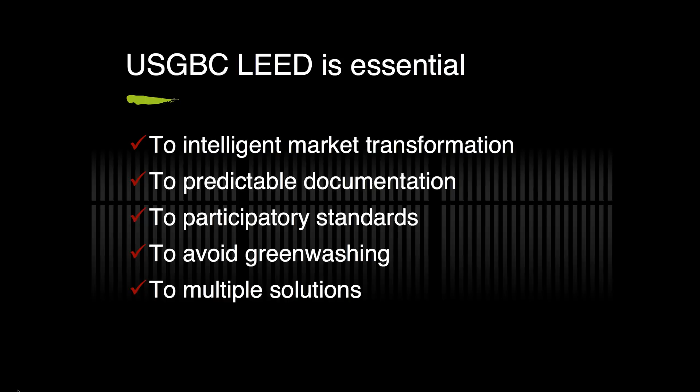So rather than starting with problems, I just want to go over quickly some what I feel are real solutions. That energy model is amazing in informing the building systems, the energy efficient mechanical systems. And until you do that energy model, you don't really know where you are in your certification model.

We had a project this morning where, when the energy model was finished, they'd sort of promised 7 points. We got 2. The project is only supposed to reach certified level, and looking for 5 other credits is now very difficult. But until you do the energy model, one, of course, you don't know where you are with regard to LEED.

But it's also the bigger picture of where are you and the amount of energy that the building is going to consume. Energy efficient building envelopes are really in the fore these days, and in many states, owners both public and private are commissioning both systems and enclosures. It's really making sure that the building is going to perform over time. You've all heard that over 20 years the cost of the building is 5%. The other 95% is the salaries of the people who work there. You just don't have the chance to go back and fix that air barrier.

Water use reduction, can't stress that enough. Indoor air quality, isn't that what it's all about? And don't forget the insulation and your dew point checks. We've talked about these things before, but insulation is clearly the best bang for your buck.

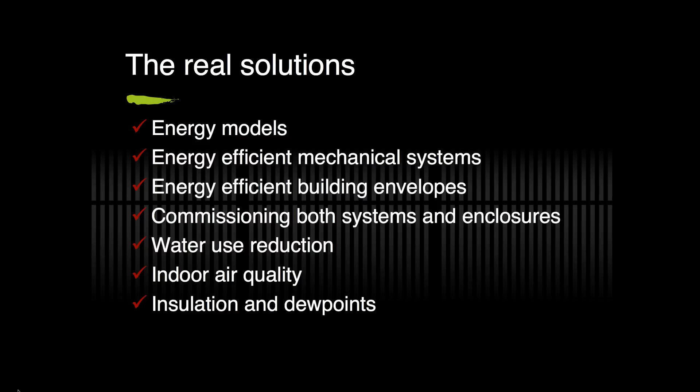Now, the problem that I have in our office with LEED specs is that most LEED projects come with a LEED consultant or someone in the design firm who's in charge.

I think there are far more firms that have people dedicated as LEED administrators than there are firms that have specification writers. So we're outnumbered.

Some people haven't had their basic CSI class in clear, concise, and correct, and so they feel they need to say something six or seven times. They need to repeat the VOC limits everywhere. It just gets completely out of control.

We've seen that before - the conflicting and unenforceable requirements. You know, when you say that you want your wood doors within 500 miles and you want them to be FSC certified, but you picked a veneer that just can't happen, it just becomes basically a fake spec.

A long time ago I learned that the last thing I wanted to do was confuse the contractor's estimator. We'll work on the job for a year, the contractor will get a month to bid it, the subcontractor will get a week, they'll spend two hours on it. And if the spec confuses the estimator, if money is thrown in for extra sustainability items that aren't necessary or aren't appropriate, it's a real problem.

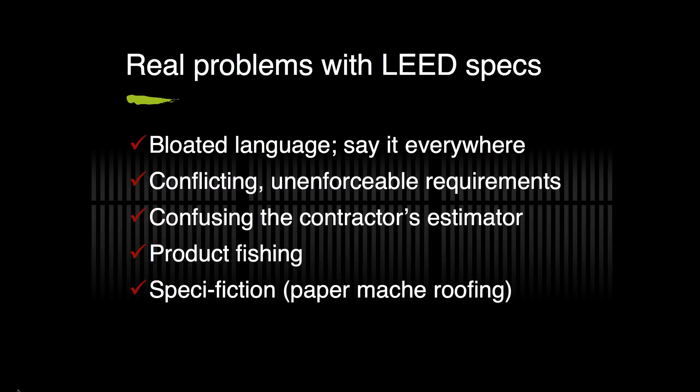Now there's also talk of a lot of red lists - red lists for a reason. Red lists generally meaning what chemicals am I not going to use. Perhaps you've seen the Environmental Building News pieces where they took everybody's red lists and mapped them, and there were a few things in the middle, but most of them had a tendency toward their own particular industry.

If you're General Motors and you're trying to paint your cars and you have silicone sealants in your paint shop, the paint won't stick. So that's a really good reason not to have silicone sealants in your paint shop. If you're running a hospital and you've got patients who are already immune suppressed, in many cases there are products that you just don't want.

We went recently through an exercise with a group of five hospitals where they decided that the rubber flooring was better than the polished VCT flooring when they looked at the cost of cleaning, the effort involved, the safety to patients. People have preferences for a reason.

We worked on some Google projects - they're very concerned about what they're exposing their personnel to, and so they have strong preferences and are a market leader. Very important to all of us.

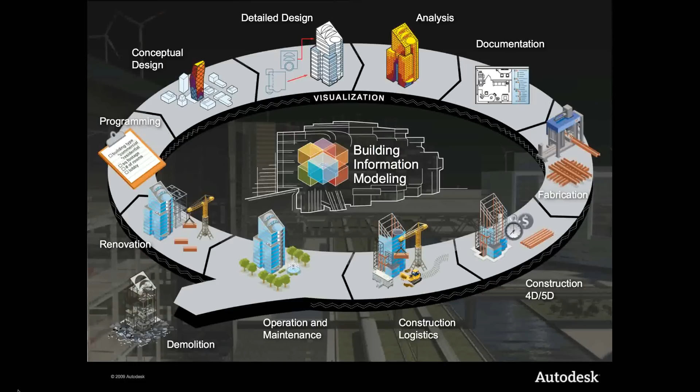This is a slide that I've shown before, and it's the life cycle of a project. Phil Bernstein from Autodesk developed this, and it just shows that we have to remember, we have to look downstream, that the spec is a tool that we're using for a very short period of time in the construction cycle, but those products that we're specifying and those certification programs that we're after are really pretty critical.

So when it comes to product selection having consequences, and again we'll get to some of the specific LEED credits, but to me performance is a sustainable attribute, and LEED doesn't always have a way to measure that, but you and I need to, our firms need to, the contractors need to, the building product manufacturers need to. It's that paper mache roof.

Just quickly, maybe you're seeing this - you've put up sheet flooring over concrete slabs recently and watch it blister, and then they tell you that if the relative humidity is under 75%, you can use whatever adhesive you want. If it's 75 to 90% relative humidity in the slab, you need one of the super glues.

And if it's over 90%, you probably need a moisture mitigation system, which could be $4, $5, $6 a foot. So we have to pay attention.

The greenest sheet flooring won't stay on a wet slab. Relative humidity and siding - if you're dealing with popular sidings like zinc or phenolics, many of them have to be used in a rain screen situation, because if the relative humidity on both sides isn't the same, you can get premature warping or corrosion.

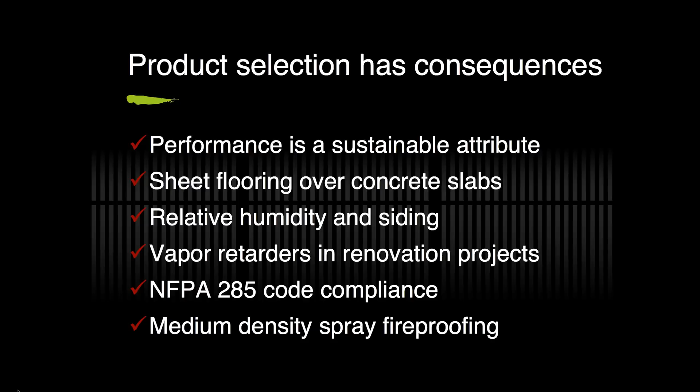Recent changes in codes to the spray fireproofing, where medium density fireproofing needs to be used on high rises, and the low density isn't suitable anymore.

So if we can take a step back and just say, what's a spec? So here's Mars ClimaPlus, and the architect has told me they'd like to specify this product from USG. They're the LEED credits, the features and benefits, and then I only get one page.

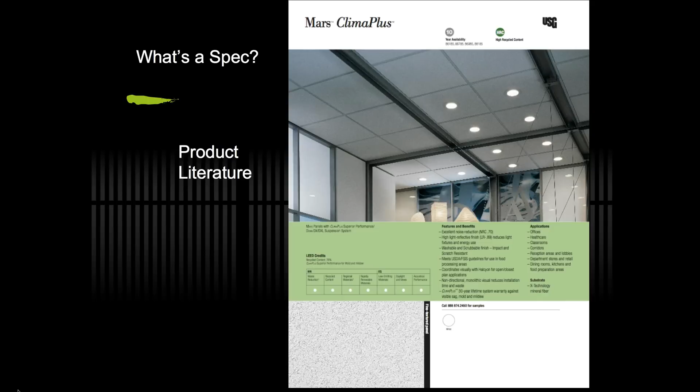Of course, we know that you have to turn to page 2 of the product literature, because there are 3 edges and 7 panel sizes and 7 grids, and usually I'm not engaged as the designer of the project, so it'd be better if the designer picked these, although in the absence of good information, I'll probably specify a middle-of-the-road product here, and then the conversation later can be whether or not we're going from 0 to the product that's ultimately selected. We're going from the middle range to there.

So these attributes, these performance attributes, many of them are affected by LEED. Some are, some aren't, but they're very critical to the manufacturers of the ceiling tiles, and so they register them.

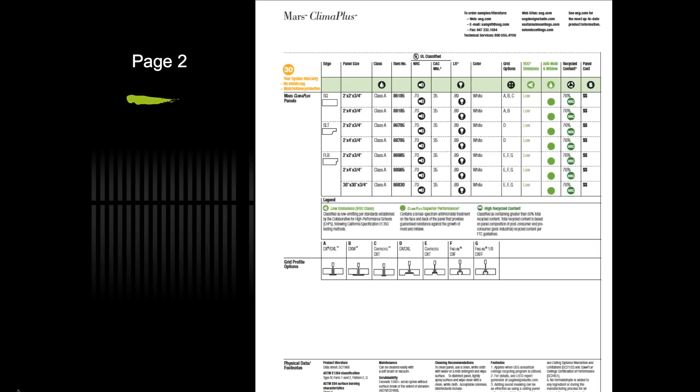If I want to put this in my favorite CSI 3-part spec, there it is: Mars ClimaPlus 86985 tile and fine line DXF, DXLF grid, and then some equals by Armstrong or CertainTeed, which is never a simple matter, and then the performance criteria.

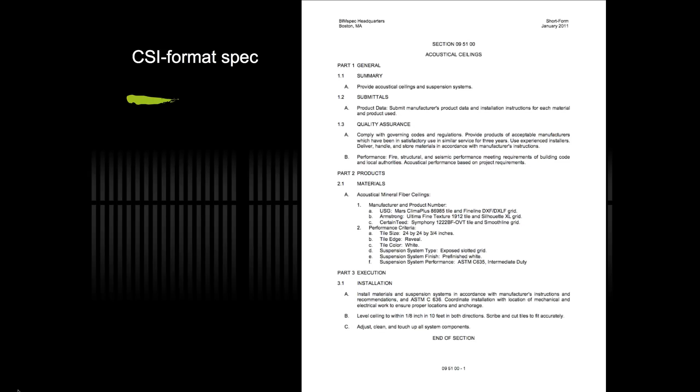So we capture this information from the building product manufacturers. We put it in our specs. We potentially put it in our BIM models. There's no limit to the number of columns you can have in a BIM model.

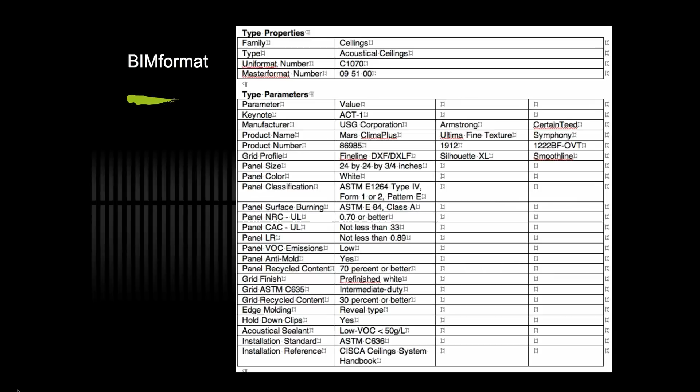Most people wouldn't take the time and aren't being paid to enter all those attributes, but they really do make a difference, whether it's energy analysis or R value or indoor air quality. When this information is in the model, we can be more predictable.

Things can predict. And then the sort of ultimate nightmare slide here that shows it's not just a ceiling. There are keynotes and there are master format numbers and uniformat numbers and cost codes and 7 LEED credits that this can contribute to. So if we're doing our job rigorously, this is where we're going to end up.

Hopefully the machines will speak to us in English instead of code. And again, maybe you see this on your projects, but this is out of a Revit model, and we get

a schedule of an item by code, manufacturer, product name, color, size, and then as a spec writer I can mark that up and without seeing the model, give it back to the architect to let them know where I need more information to actually make a spec work.

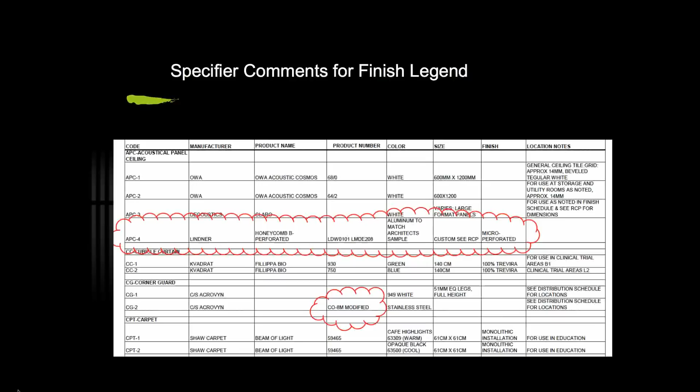So it's about looking downstream. Now

when we come back to the specific LEED credits, we know that there are 8 LEED programs. Only 8? I think that's the right number. And if you look at the different prerequisites in the credits, they're different from program to program.

So in our specs, the ones that are Microsoft Word based, we just use colored text and say this color is for LEED NC, this color is for LEED CI, and this for CHPS, or this is for schools, because the language is similar but it's not the same. If you're ultimately trying to make sure you earn the credit, you need to have the right language.

So let's take a few minutes and go through some individual credits and some of the things that we see. I'd be glad to know what other people see as well.

We know if we have our solar reflectance index at 78 or higher for our roof, we're going to get that LEED credit.

The question comes up sometimes in northern climates, why white? There are some people who are fairly vocal about believing that black is better because you want some heat gain. But I guess the real issue is that it's sitting on top of 5 inches of insulation. So isn't it really better to reflect that solar radiation back?

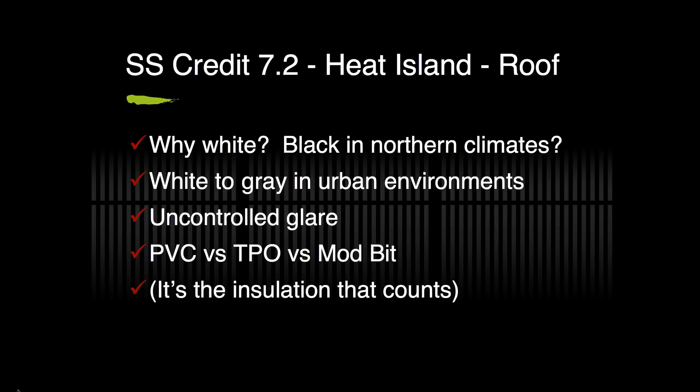So the next credit, and again, we're just hitting the credits that we see as specifiers most often. These are often credits that need to be enforced during construction as opposed to design. The white roof is, of course, during design.

Construction waste management, we've put it in every spec we've produced for over 10 years, and it always provokes some sort of discussion.

There's a project in one area where they said it was going to cost $30,000 to throw the things away, versus recycling them, because they'd just been planning on throwing them in a field. But at least in the Northeast, and I'm told in the West and in the South, waste management is a profit center, getting things back out of the waste stream and into production again. And in the Northeast, many of our landfills are closed, so you almost don't have a choice.

One of the issues on the construction waste management credit is getting started early. You start doing these early packages for site utility relocation and early excavation, and sometimes some of the LEED credits are still floating around. Just as you have a choice of where your LEED boundary is, as long as it's the same for every credit, you can start your LEED project at a prudent time.

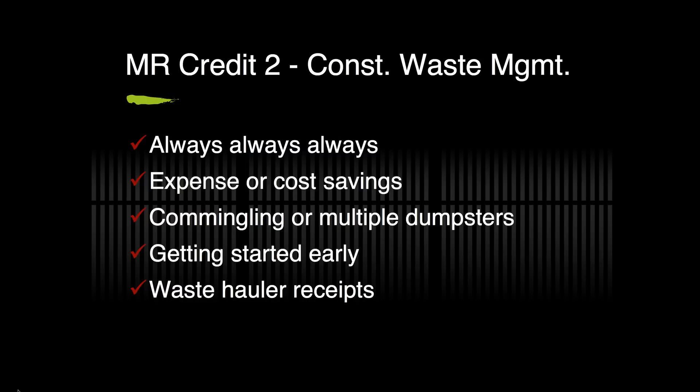Now that recycled content credit, how many people chase after this? There is a bias toward the metals and the things that you can recycle. It's kind of hard to start with recycled wood or recycled brick, because wood and brick have very low embodied energy.

You just make them and use them. You transform them from clay or from trees, whereas metals, even when steel or aluminum are reprocessed, there's still a huge amount of embodied energy. So you might build your whole building out of wood, and it has nothing to do with recycled content, and then you just sort of let this credit go. You also have to make sense.

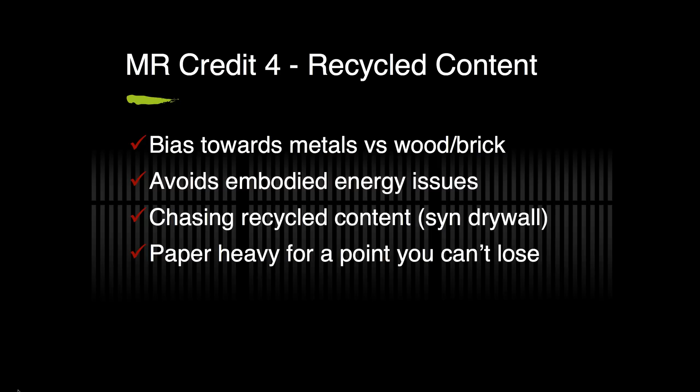Next favorite is the regional materials. Now, there really are efficiencies in manufacturing, and there really are efficiencies in transportation. The rail people have been, what is it, a ton, 400 miles on a gallon of gas or something like that, or a gallon of an equivalent piece of fuel. So maybe I do want all my windows made in Wisconsin. You have to decide that while it's nice that there are regional materials, you have to draw your own conclusions.

We could all have zero net energy buildings and no centralized power plants, but I don't think there are enough solar panels or geothermal well material available on the planet if we chose to do that. We're at 7 billion people. We're headed to 9 billion people by 2050, with 80% of that growth in the 20 poorest countries, and so efficiencies.

It's okay. Sometimes it's increased project costs, but it's paper heavy for a point you won't lose if you are predictable. It doesn't do a lot of good, in my experience, to argue with the structural steel fabricator who submitted a price to then ask them to confirm their extraction and their manufacturing within 500 miles. It sort of is, or it isn't, and you need to let people know that before you go out to bid.

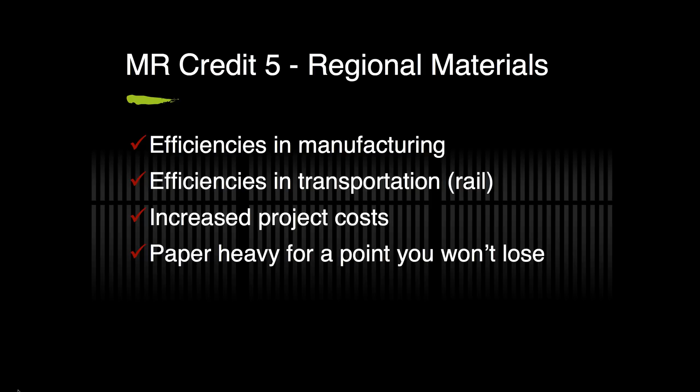So the certified wood credit, FSC versus SFI, the members are going to vote to decide. You need to research whether or not that white oak veneer, AWS grade AA, is really available FSC, or whether there's only one log in the world that meets that criteria. So it goes back to the impossible or unenforceable credit.

So what we usually see is that you target your 50%. A lot of projects you can get it with your doors, or you add your doors and your millwork. You skip the plywood that's in the floor of the elevator. It's really kind of irrelevant. And again, sometimes people, if they can't get to 50%, we'll let the credit go altogether. Maybe 40% is okay. You won't get the credit, but maybe it's what you wanted to do.

I do believe that both FSC and SFI have very sound principles. If a major logging company chooses not to do chain of custody for the 100,000 logs they deal with each day, well, that's their business decision. And when you put FSC in your spec, that's your business decision. But remember, you need that chain of custody, and don't let one person fall out of the loop.

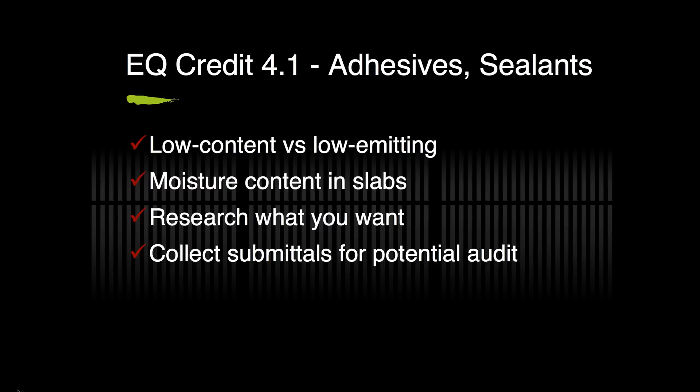Moving on, very close to adhesives and sealants, paints and coatings. Low VOC versus zero VOC - is the low VOC paint at $16 a gallon, or the $32 a gallon zero VOC paint, going to provide the best performance?

Some people feel that again, it's the issue of low content versus low emitting. The LEED requirements for the South Coast Air Quality Management District, I believe, manages content. CHPS is more focused on lower emitting over time, and so you have to decide what's right for your project, and you can comply with both. But it's performance versus cost versus credit, trying to figure out what it is that you need.

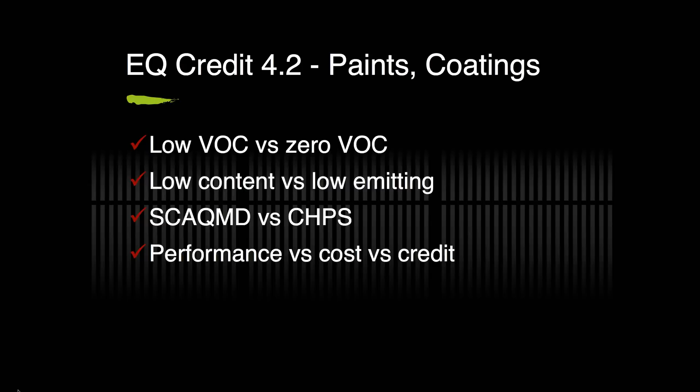The flooring systems - when the FloorScore requirement came out, it seemed that it was very California based, and we weren't able on the East Coast to meet the credits. The manufacturers were really rushing to comply.

There's still a lot of single attribute selection when it comes to flooring. I want a flooring that's non-PVC, or I want a flooring that's virgin rubber or recycled rubber. But the issue about flooring is about the performance of the floor. Does it work? It's beat up all the time. What is it you're going to use to clean it with?

And some of the designers, it's my understanding that if you make tile flooring or wood flooring, you don't need that FloorScore approval. Dal-Tile and others said, look, we've tested, we make thousands of products, all the tests come up the same. It's obvious, and I understand that that's acceptable.

So again, it's about the flooring performance. It's what is it that you're going to make work.

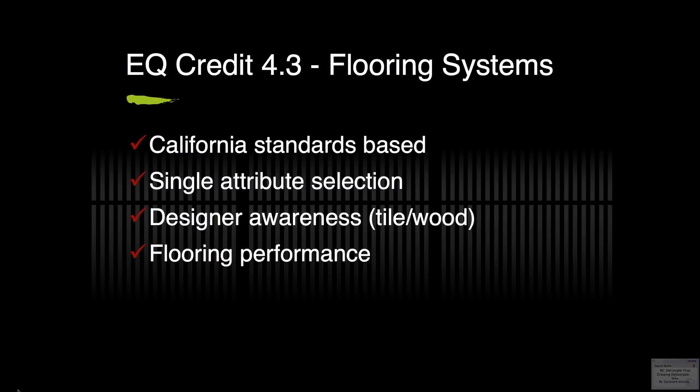Composite wood seems to have a cost impact. It seems to get bounced out of projects. A number of the agri-fiber plants have shut down. I think Masonite bought a number of them.

There's some question when you're using composite wood in a regular commercial setting, whether agri-fiber products are quite as durable. They haven't gone through as many years of testing and performance. If you're using them for cores, it's affected some of the finish warranties.

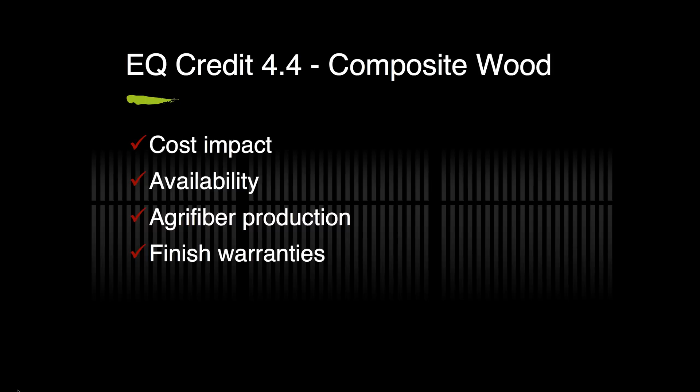I think industry has kind of solved that now, but you have to remember you're looking for an installed product that's going to work. So, what's CSI been doing? Paul Bertram is the immediate past president, very focused on GreenFormat. Today, the GreenFormat PDF is a wonderful document on the CSI website, for free.

The GreenFormat maintenance task team is moving forward to see how that works. The GreenFormat website and development hasn't continued on that, but it doesn't mean that the underlying information isn't relevant. So CSI understands sustainability as a group and has put some things together, even this practice group.

So again, those of you on the line know that you can go back a year, maybe two, and see some excellent presentations that go into much more detail on things like FSC, flooring, LEED, water, or concrete paving.

So CSI works because it has its formats. Again, at the end of this presentation, my email is there. If anybody wants this PowerPoint, I'd be happy to send it to them.

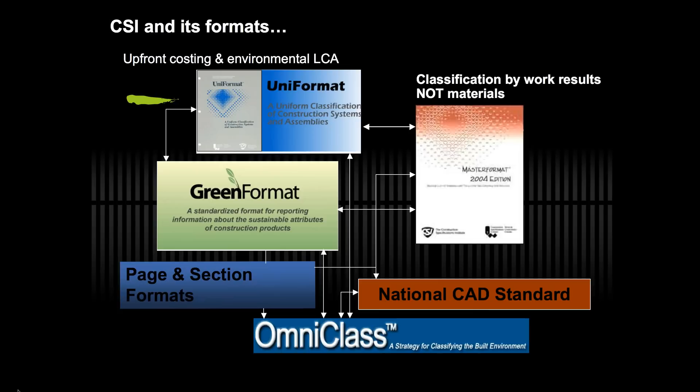MasterFormat, CSI's flagship, classification by work results, UniFormat, National CAD Standard, all these things. So CSI works toward organizing our construction environment, so as we move things across project phases, we know what processes we're doing.

Are we doing conceptual design? Are we doing detailed design? Are we doing cost estimates? These are where the formats are located.

And although everybody on the call here may say, oh, I know about that, I know about SectionFormat, MasterFormat, GreenFormat, maybe I know about the National CAD Standard, even OmniClass.

Many people don't, and many LEED administrators don't, and so it's up to us to show them that because there is this structure, we can be predictive when it comes to LEED credits and get what we want out of our projects.

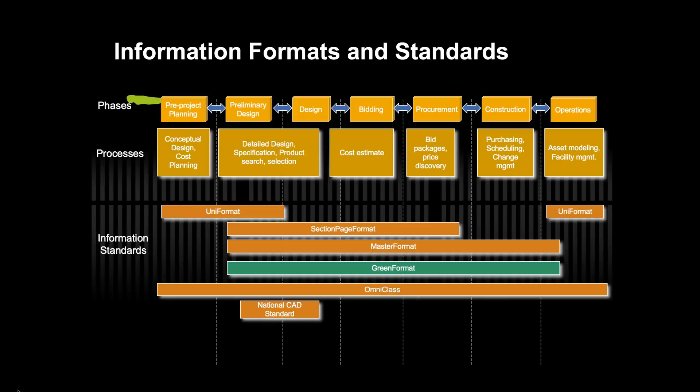The old standby slide from one of the early manuals of practice. We've got our project manual, our procurement documents, our construction documents, and our contract documents. This isn't the place to really go through all that, but it's here, and it's good to show people that we're organized.

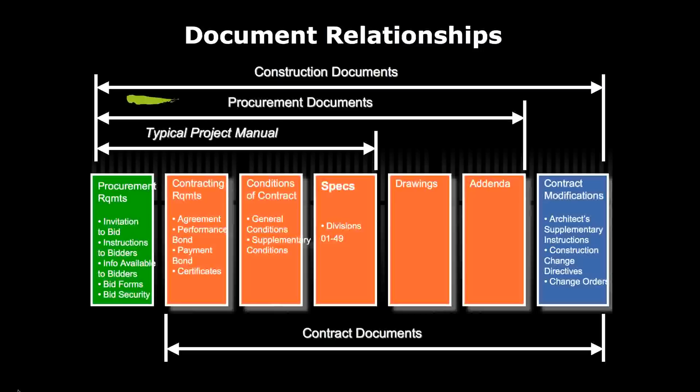And then finally, drilling down to the bottom layer, when we've got our CSI section format, we know that Part 1 general, Part 2 products, Part 3 execution is really what's critical.

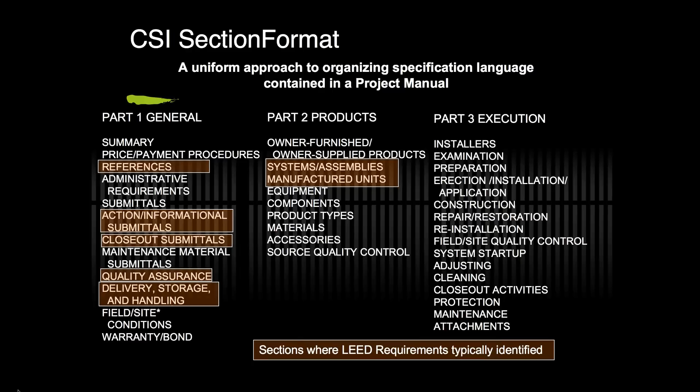We'll never use all these paragraphs in any one given spec, but they're there for you to communicate what the designer's intent is, if you're the specification writer, so that the contractor's estimator doesn't make a mistake.

So, starting to wrap up here, what is driving your spec? What are you using as the basis of your spec? Is it moving you closer toward LEED, further away from LEED? Are these products in your specs, whether or not it's a LEED project?

We don't have two sealant specs. We don't have two paint specs. We have, you know, the lower VOC and lower emitting products make perfect sense, especially the ones that perform at the highest level.

So if your owner is driving your specs and telling you what you know, if you've got a hotel owner, and you've got that communicating door spec that's in their master specification because it has to have an STC of 53, because of all the complaints that could potentially arise between people in adjacent hotel rooms, is that door FSC certified, or is it not?

Are you going to add it if it isn't? You know, many of the owner specifications have LEED as an add-on, not a default. Others, it's just the other way around. Your own office master specification, it's a difficult thing to keep up to date.

It's the most prevalent type of spec master that's out there because you've got it in Word, you've just worked on it, you haven't built the building that it relies on or that it specifies, and so there haven't been any problems.

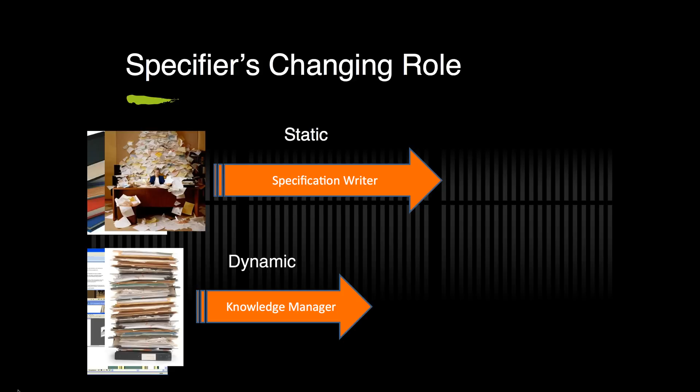So they're there if you want to poke around, or you can of course just always hit Google. We see ourselves as specification writers being an important part of the building team, and we really are, but as we move from print to looking at models to someday being able to grab that model and shake it and get information out, that's where we need to move to.

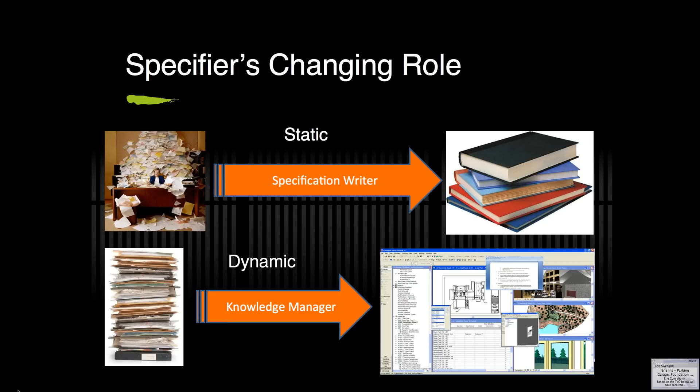it's a big planet, and to me, LEED and CSI and other organizations give us a unique chance to talk together. So that was what I wanted to go through today, resolving conflicts between LEED credits, product selection, and specs.